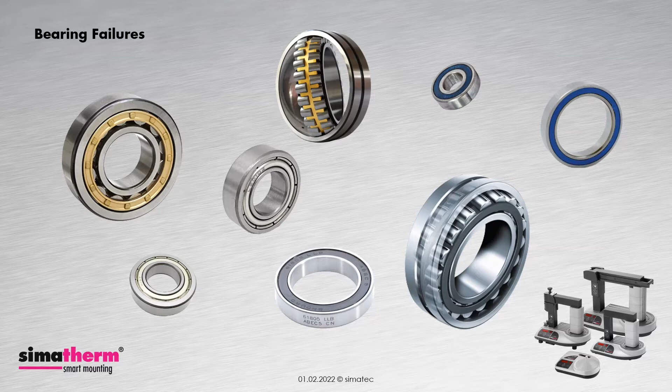Rolling bearings are used billions of times around the world and have become an indispensable part of mechanical engineering. The expectation of the service life of such bearings is correspondingly high. The service life depends on various factors. Of course, the selection of the correct bearing type and the required dimensions play a central role here. However, the correct installation method and the lubrication are often underestimated, forgotten, or even ignored.

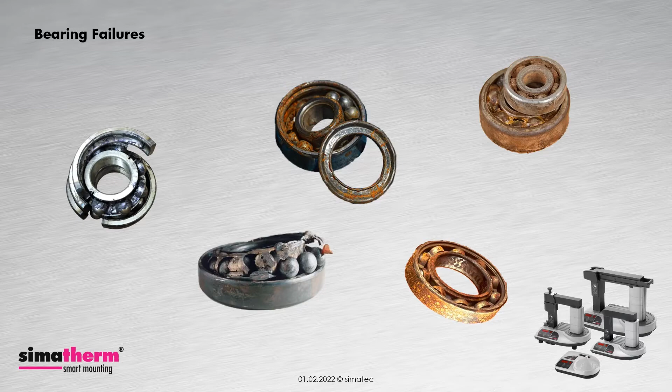In practice, many rolling bearings fail at an early stage of their service life and do not achieve the originally calculated or estimated service life by far. More than 60% of all premature bearing failures could be avoided.

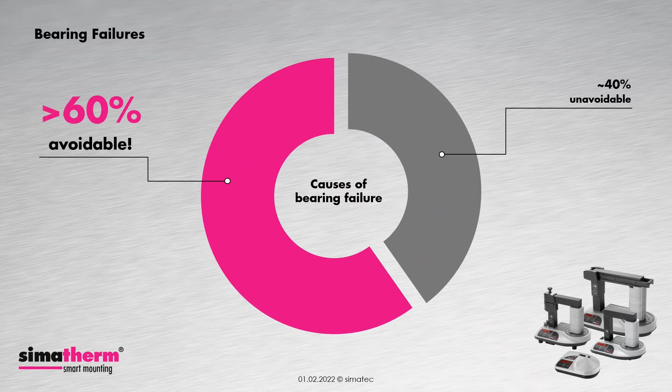Looking at different studies concerning the cause and frequency of bearing failures, they can be divided into the following groups. About 14% of early bearing failures are due to external contamination. Approximately 36% due to insufficient lubrication. Another 34% fall into the material fatigue category. And about 16% of early bearing failures are due to improper assembly.

If suitable mounting tools and the necessary knowledge are lacking when replacing rolling bearings, new bearings are often subjected to high forces during mounting and thus damaged. Early bearing failures are thus pre-programmed. The right method with professional special tools already helps against this during bearing fitting. Only in this way will the new bearings achieve the expected service life.

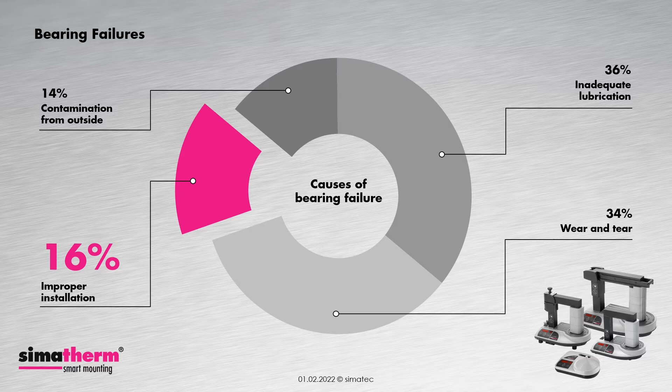Our simatherm heating devices and Simatool quality tools were developed exactly for this purpose. They guarantee a successful experience in all aspects of mounting and dismounting rolling bearings. In this presentation, we will focus on the different simatherm heating devices.

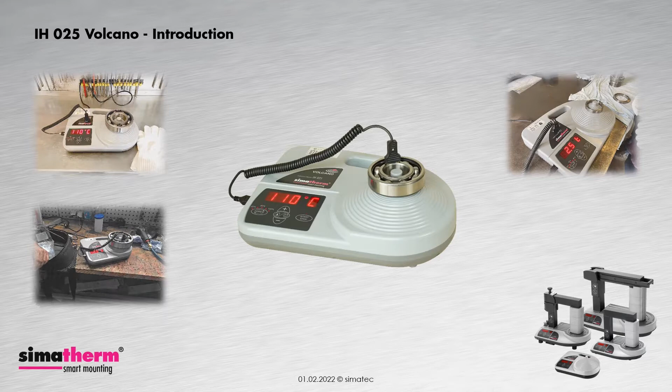Let's take a closer look at simatherm induction heaters. First, our smallest induction heating device, the IH025 Volcano. The IH025 Volcano is suitable for heating rolling bearings or other ring-shaped workpieces such as bushings, shrink rings, pulleys, rings, or similar. It is portable and intended mainly for repair work and rolling bearing replacement in the field by service and maintenance staff.

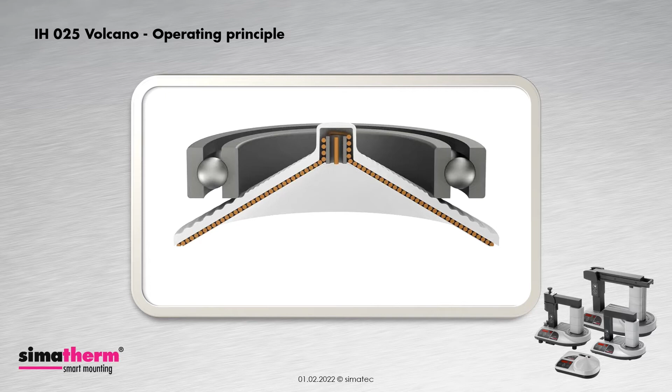But how does it work? The IH025 Volcano generates a magnetic field in the medium frequency range, similar to an inductive hot plate. This magnetic field induces an electrical voltage specifically in the inner ring of the workpiece. The generated eddy currents efficiently heat the component. The heat is generated within the workpiece by the current flow, leaving all other parts of the heating device cold. Since the heating principle is based on the eddy current principle, the parts to be heated must be made of ferritic, that means magnetic, metals. Whether the part to be heated is magnetic can be easily checked using the magnet of the temperature probe. This heating method, patented by Simatec, enables components to be heated quickly, easily, and energy efficiently.

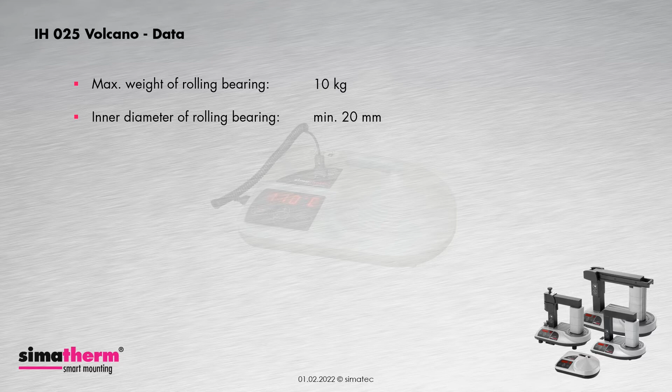Let's briefly look at the most important technical data of the IH025 Volcano. The IH025 Volcano can be used for workpieces with a maximum weight of 10 kilograms. The inner diameter of the workpiece must be at least 20 millimeters, and the outer diameter must not exceed 160 millimeters. The heating temperature can be set in the range from 20 to 180 degrees Celsius, degree by degree.

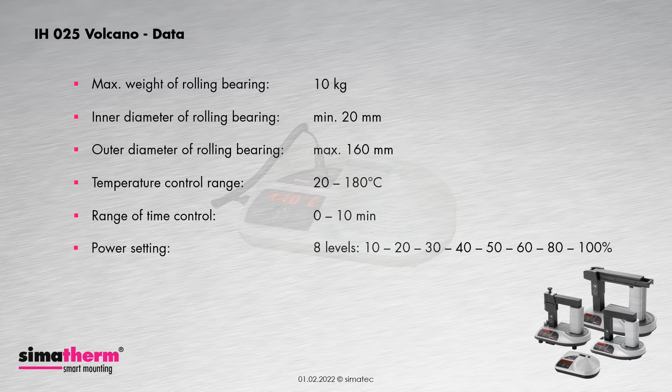If the workpiece is heated by using the automatic timer, the heating time can be set in the range from 0 to a maximum of 10 minutes. In addition, the power of the unit can be adjusted as required. There are 8 power levels available for the user. The device is available in 3 different versions for different voltages: 100 volt, 110 to 120 volt, and 220 to 240 volt. This must be kept in mind when ordering. Which version is the right one depends on the existing voltage at the place of use.

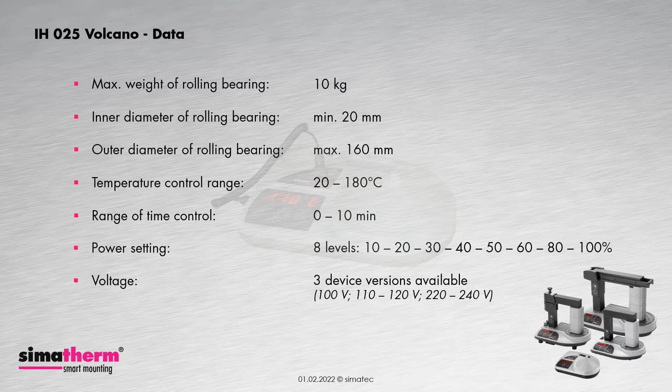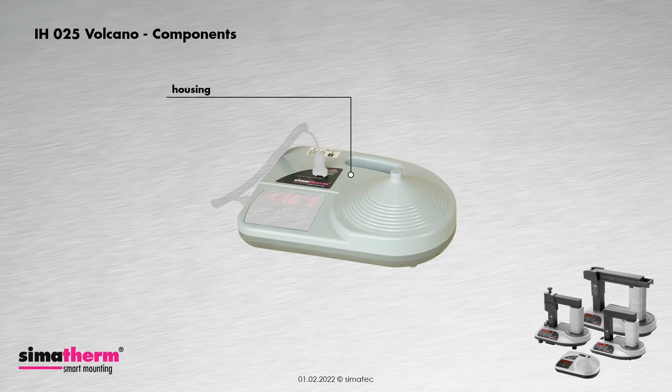Let's talk about the main components of the IH025 Volcano. First of all, we have the plastic casing. On the control panel, the desired temperature or heating time and the power level are set, and the heating cycle is started. The workpiece to be heated is placed on the step-shaped support cone. The temperature probe is required when the workpiece is heated in temperature mode and is used to monitor the workpiece temperature.

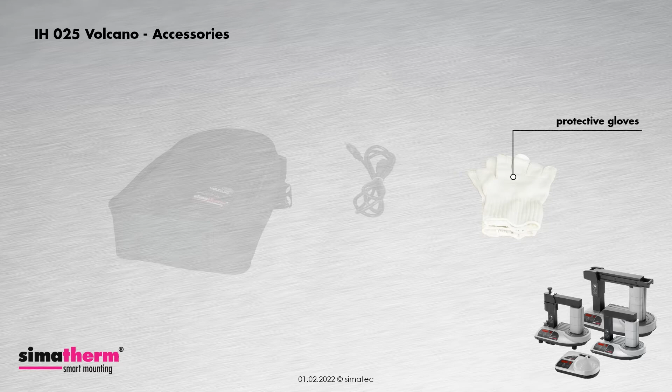Here again the components in the overview. The IH025 Volcano comes with the following standard accessories. First of all, we have the practical carrying bag with a strap. Each device is supplied with a country-specific power cable. To remove the hot components from the unit and to prevent hands from being burned, protective gloves are also included as standard. And last but not least, the already mentioned temperature probe.

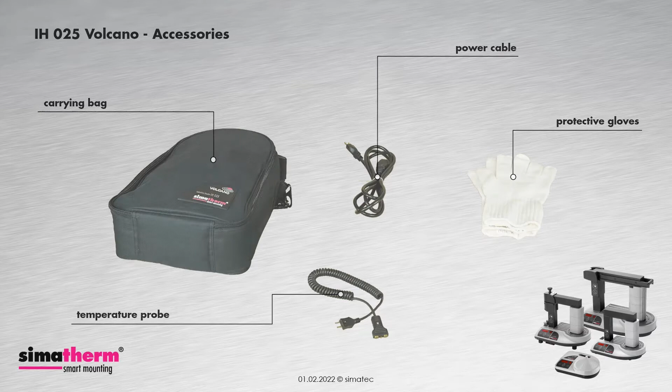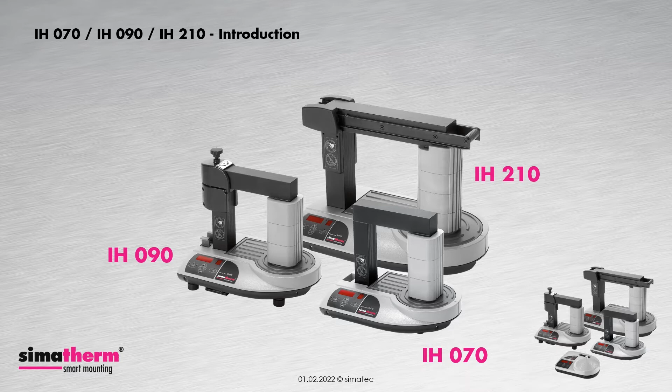In addition to the IH025 Volcano, we also offer other induction heaters: the IH070, the IH090 and the IH210. These are intended for heating rolling bearings; however, other ring-shaped components made of metal can also be heated, for example liners, shrink rings, pulleys or gears. These units can be used to heat components that fit over the induction coil and between the 2 vertical yoke supports when the yoke is closed. Furthermore, smaller bearings or workpieces can also be heated by placing them on one of the standard yokes.

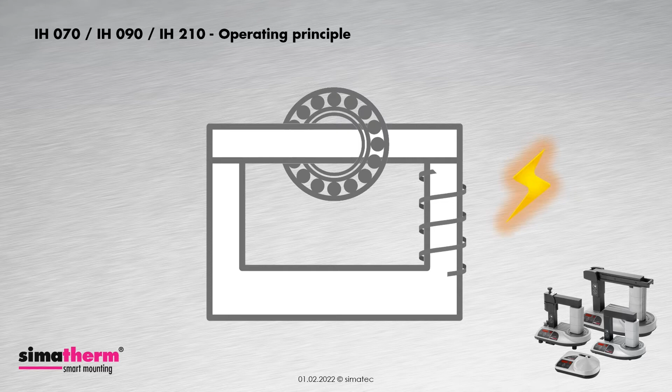The mode of operation is comparable to an electric transformer. By using an induction coil, a very high current with low voltage is induced into the ring-shaped workpiece. This heats the workpiece evenly within minutes.

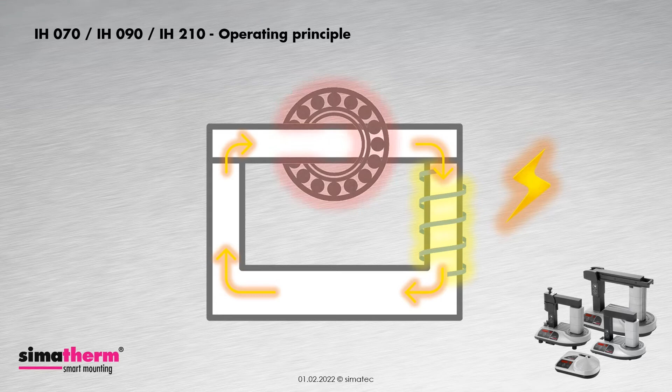Only the workpiece becomes hot. The device remains cold and can be touched at any time without danger. Induction heating is very efficient because the workpiece is heated directly by the induction current.

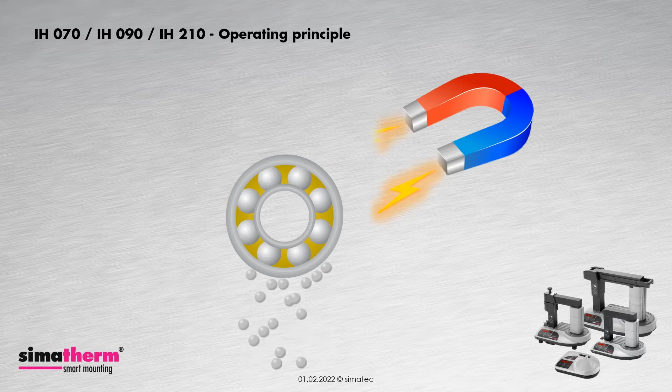Since inductively heated bearings become magnetic, there is a risk that the bearings will attract metallic contaminants that can damage the bearing in the long term. To prevent this, our simatherm heaters are equipped with an automatic demagnetizing electronic as standard. This means that as soon as the heating cycle is stopped, the bearings are automatically demagnetized.

When using the simatherm heaters IH070, IH090 and IH210, make sure to select the correct support yoke.

Workpieces are heated most efficiently when they can be placed around the vertical coil. In this case, always use the largest support yoke to close the circuit.

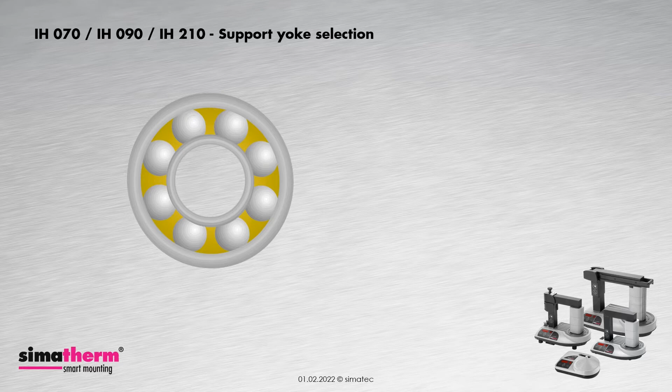In order to be able to use the devices optimally, there are support yokes with different cross sections. To achieve the optimum efficiency of the heating devices, the largest possible yoke must always be used. If a too small yoke is used, the heating process takes longer and the energy consumption also increases. The unit therefore no longer works efficiently. In extreme cases, the unit can overheat.

The workpiece does not have to touch the support yoke or the coil in order to be heated. It is therefore possible to heat large workpieces that rest on the support rack but do not touch the yoke.

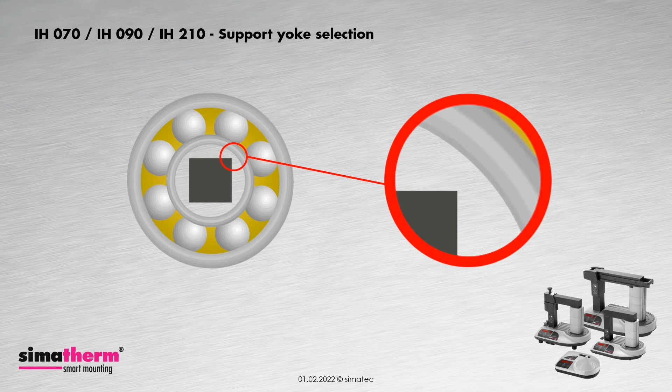In some cases, it is necessary to optimize the cycle time or the heating time. For example, in serial assembly, in which the individual assembly steps must be completed in a specified cycle time. By adapting the yokes, the cross-section can be enlarged and the heating time reduced. Such special yokes are manufactured according to customer-specific requirements and are only available on request.

Next, we will take a closer look at the three devices. We will start with the IH 070.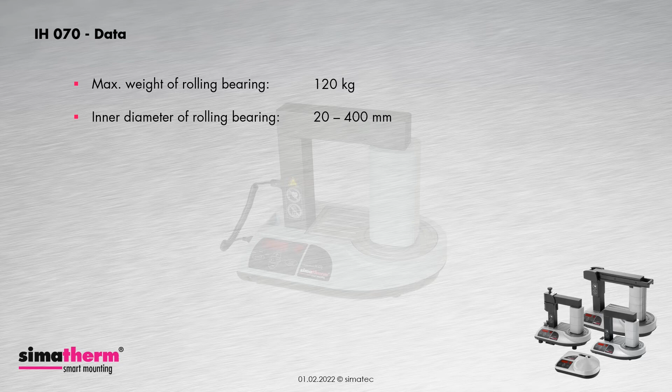The maximum workpiece weight that can be heated with the IH070 is 120 kilograms. The workpiece inner diameter must be between 20 and 400 millimeters. The heating temperature can be set in the range from 20 to 250 degrees Celsius, degree by degree. The heating time for the automatic timer can be set from 0 to a maximum of 60 minutes. The unit is equipped with 5 power levels that allow the user to easily and quickly adjust the power.

The IH070 uses so-called support yokes. Like the IH025 Volcano, the IH070 is available for 100 volt, 110 to 120 volt and 220 to 240 volt.

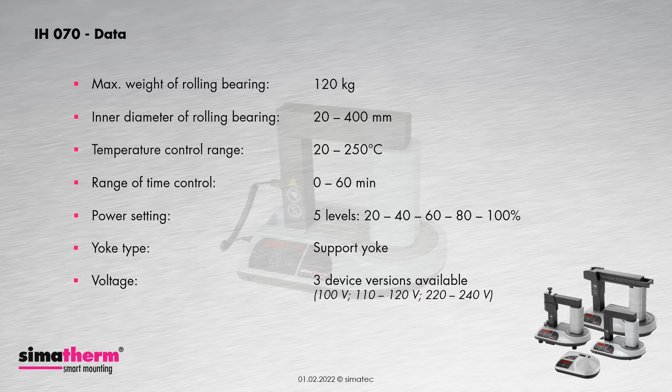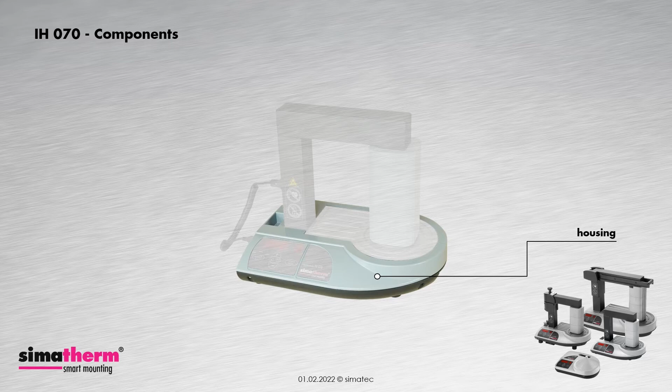One of the most important components is the housing, which is made of cast aluminium. The desired settings such as temperature, heating time, power level and so on can be easily and conveniently set on the clearly arranged control panel.

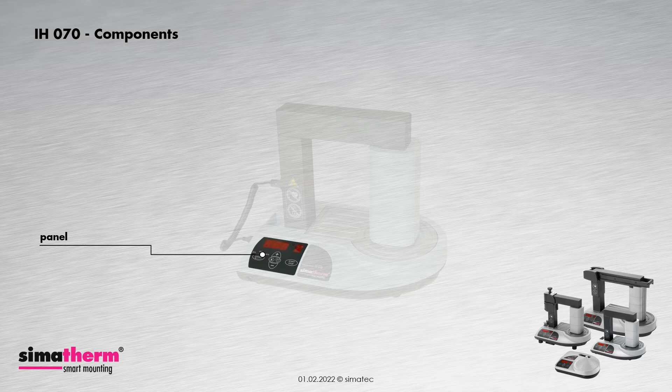On top of the housing is the so-called rack. The U-core is one of the central components. It is screwed to the base of the housing. The lower brace of the U-core is hidden by the housing and the rack, so only the two vertical arms can be seen.

The yoke, which has already been mentioned several times, is placed on the U-core to close the circuit. Another key component of this type of device is the coil, which is mounted over the right vertical arm of the U-core.

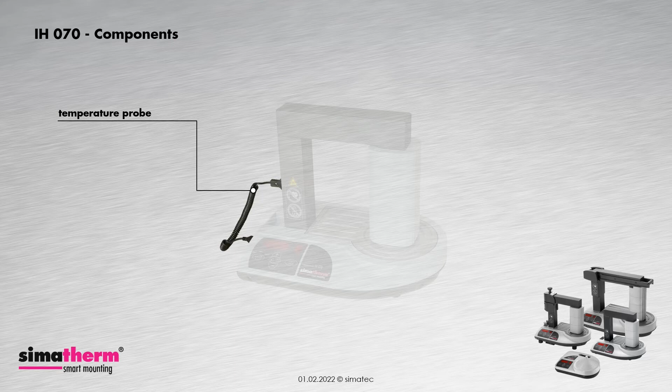And last but not least, we also have the temperature probe. This probe measures the temperature of the workpiece during the heating process when temperature mode is used. As soon as the target temperature is reached, the heating process is stopped. In this way, unintentional overheating of the workpiece can be avoided. Here is an overview of all the important components.

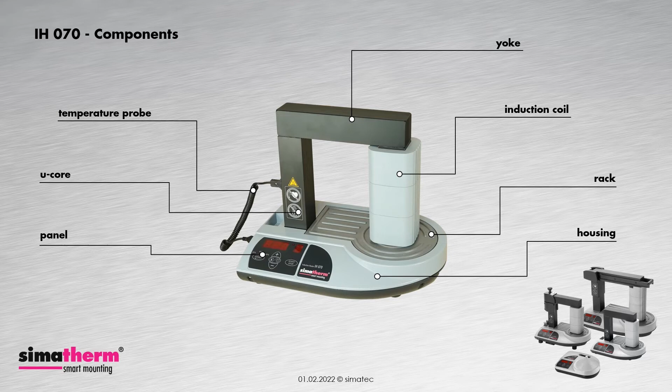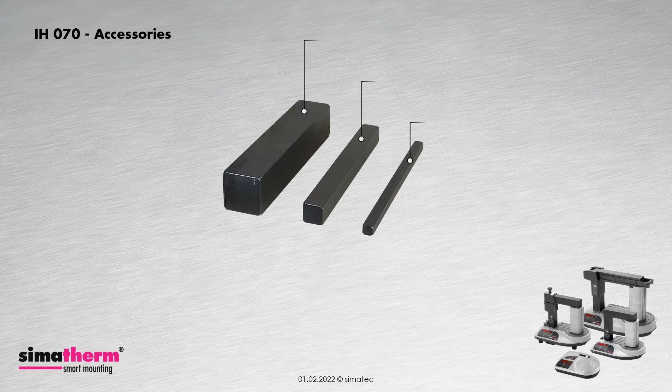Next, let's take a quick look at the IH070's standard accessories. As already mentioned, the appropriate yoke must be selected for efficient heating of the workpieces. The IH070 is supplied as standard with 3 yokes. These have a square cross-section of 55, 28 and 14 mm.

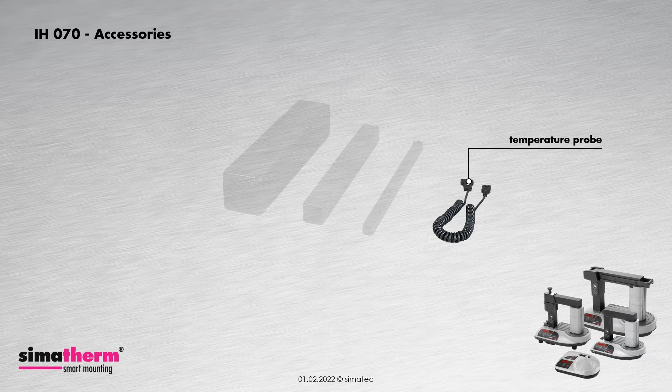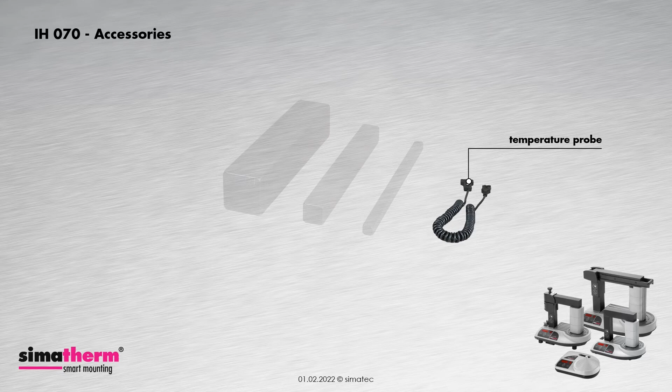Of course, the temperature probe is also included in the scope of delivery. By the way, the same temperature probe is used for all simatherm induction heaters. So, if you have an IH025 Volcano and an IH070, for example, you can interchange the temperature probes of the devices. And of course, the protective gloves must not be missing here.

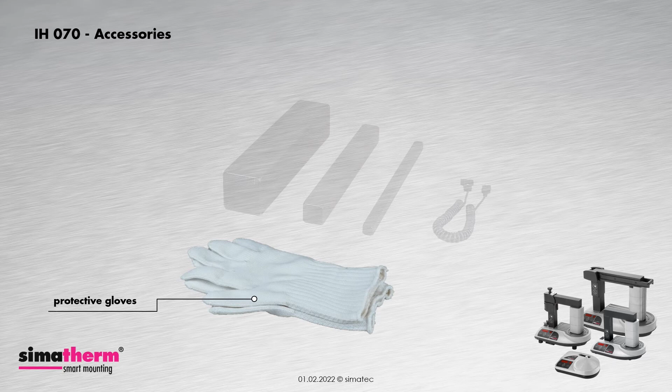Here again, the standard accessories of the IH070 at a glance.

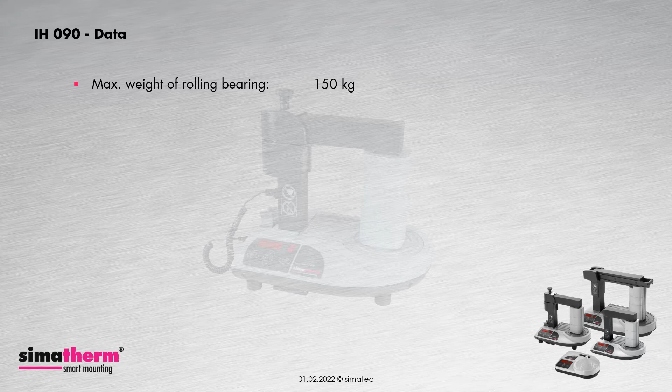Next we will take a look at the IH090. The maximum workpiece weight that can be heated with the IH090 is 150 kilograms. The workpiece inner diameter must be between 20 and 400 mm as with the IH070. Also, the setting range from 20 to 250 degrees Celsius for the heating temperature and the setting range of 0 to 60 minutes for the automatic timer are identical to the IH070.

The IH090 also has 5 different power levels, but is equipped with a fan for continuous operation as standard. In addition, the so-called swivel arm for the yokes is also fitted as standard on the IH090.

But the biggest difference to the IH070 is the voltage. The IH090 is available for voltages of 200 to 230 volt, 400 to 480 volt, and for 500 to 575 volt. As with all devices, this depends on the voltage available at the place of use.

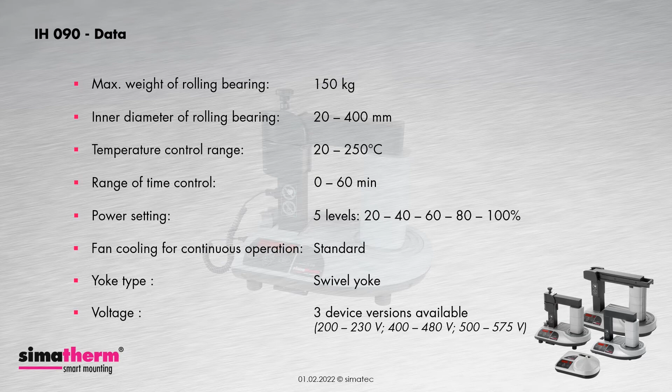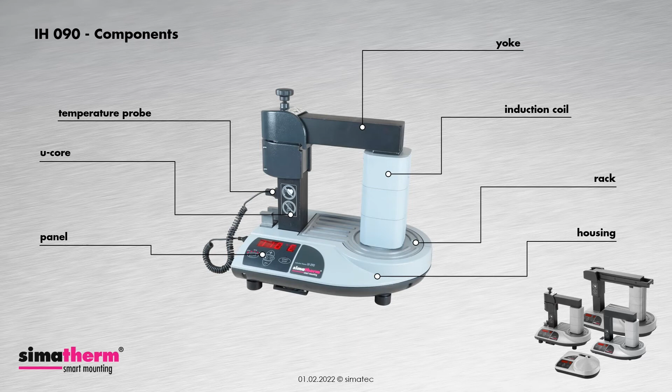As the sizes of the IH070 and IH090 are identical, most of the components are used for both devices. The swivel arm is attached to the IH090 as standard. With this swivel arm, the yoke can be easily swiveled forward to place the component to be heated around the coil or on the yoke.

The fan is mounted on the bottom of the housing. This ensures that the device does not overheat, even when heating many workpieces in a short period of time. The higher feet are needed to keep the device stable with the fan attached. Finally, once again an overview of the components.

Of course, there are also parallels to the IH070 in regard to its accessories. The 3 yokes, the temperature probe, and of course the protective gloves are all included in the scope of delivery. By the way, the 3 yokes are identical to the yokes of the IH070.

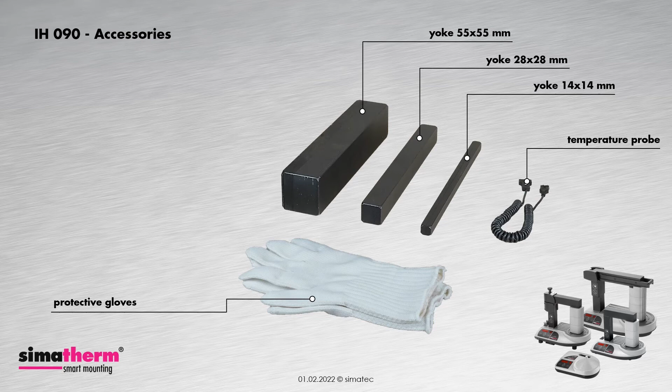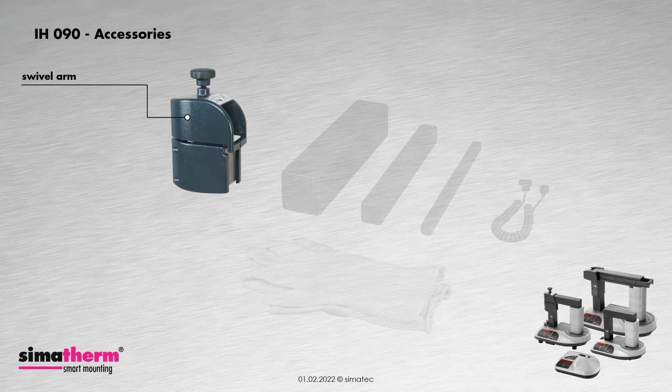As already mentioned, the IH090 is equipped with the swivel arm as standard. In order to be able to use the two smaller yokes with the swivel arm, the yoke adapter is required. This is also included as a standard with the IH090. And here again, the overview of the standard accessories.

Now let's move on to the IH210. As you can easily see, the IH210 corresponds to the IH070 and IH090 not only in functionality but also in design. So there are again some parallels to the two smaller devices. First, let's take a look at the device's data as well.

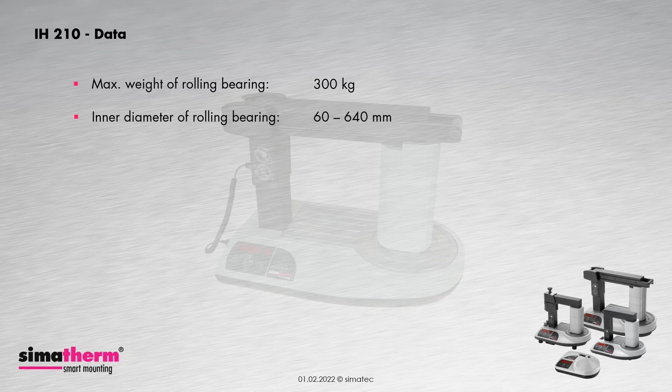Since the IH210 is larger than the other two units, not only heavier, but also larger workpieces can be heated. This allows workpieces with a maximum weight of 300 kilograms and an inner diameter of 60 to a maximum of 640 millimeters to be heated. As with the IH070 and IH090, the heating temperature can be adjusted by degrees in the range from 20 to 250 degrees Celsius.

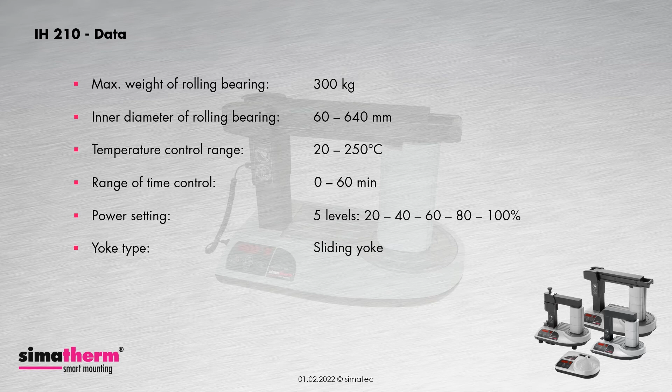There are also no differences in the setting of the heating time and the number of power stages. The heating time can also be set to a maximum of 60 minutes, and there are also 5 power levels. The standard yoke of the IH210 is considerably larger and heavier than the large yoke of the IH090 and is therefore built as a sliding yoke.

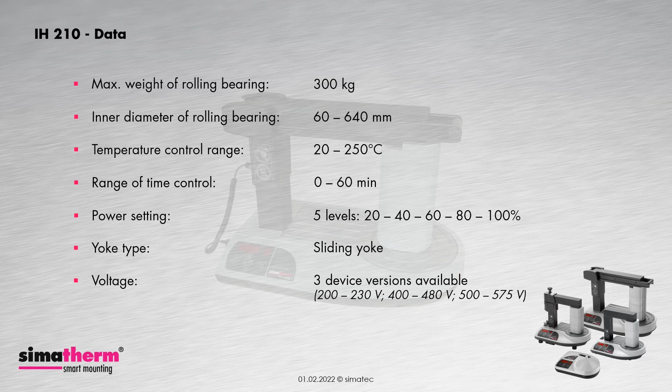Regarding voltages, the device again corresponds to the IH090. The IH210 is also available for voltages of 200 to 230 volt, 400 to 480 volt and 500 to 575 volt. Let's move on to the components of the IH210. Here again the already known components.

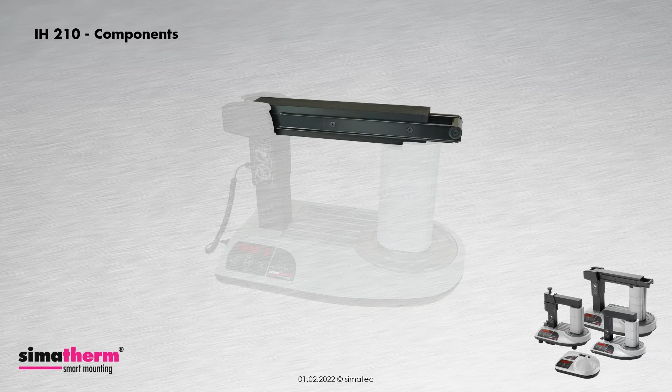The standard yoke of the IH210 has a square cross-section of 70 mm and is pushed to the left to open. Due to its weight, it cannot be used as a swing yoke, as otherwise the unit would tilt forward when opening the yoke. The roller support is used as a guide and as a stopper for the sliding yoke. And here again a small overview of the most important components.

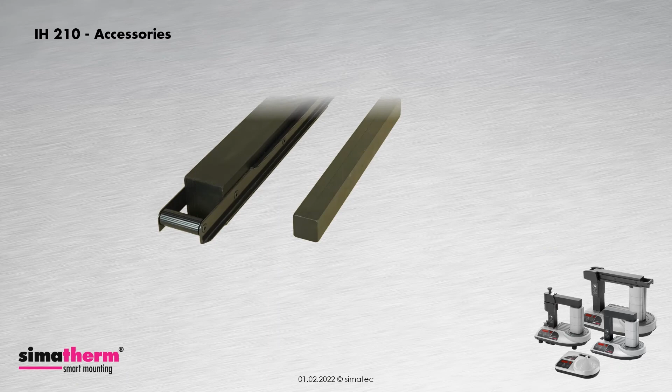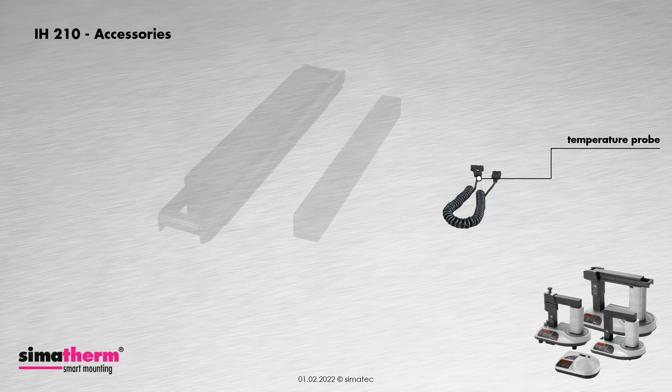Included with the IH210 is the sliding yoke with a square cross-section of 70 mm and a support yoke with a square cross-section of 40 mm for smaller workpieces. Of course, the temperature probe must not be missing here either. And as with all simatec heaters, the IH210 comes with a pair of protective gloves.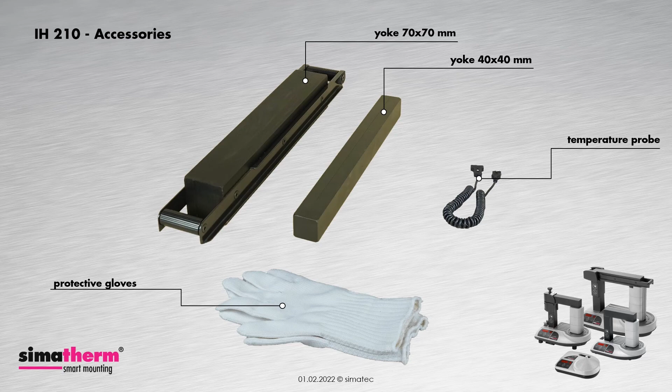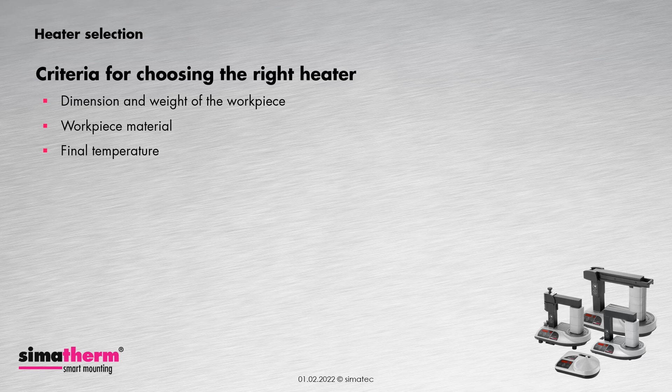Now that we have learned about all simatherm induction heaters, the question is, which device is the right one for my application? The choice of the right device depends on the following criteria: dimension and weight of the workpiece, material of the workpiece, final temperature to which the workpiece must be heated, the heating time, that means how long the heating may take at most, and whether the unit is to be used for single parts or in serial operation.

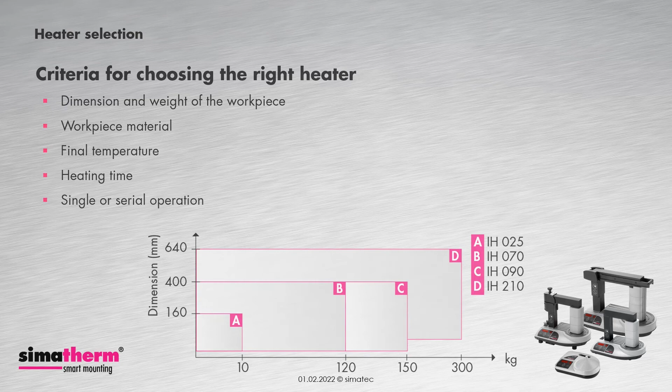In addition to our simatherm induction heaters, we also offer two hot plates, the HPS and the HPL. HP means hot plate, the S stands for small, and the L stands for large. Both hot plates are controlled by a temperature controller and are especially suitable for small bearings and machine parts.

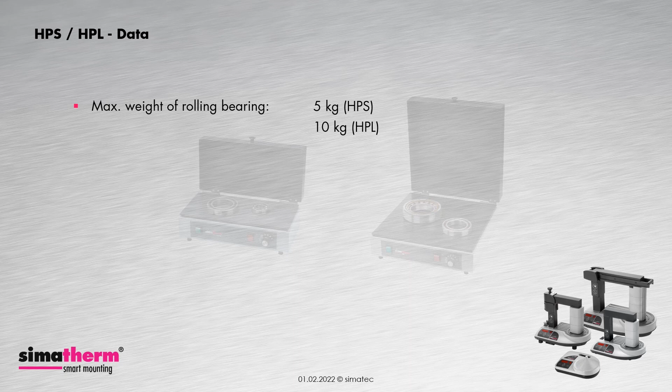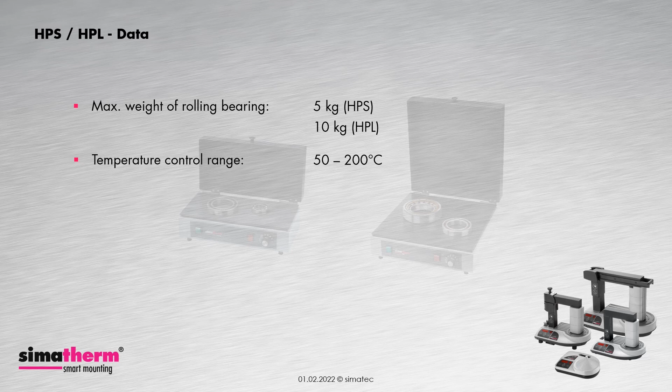The HPS can be used to heat workpieces with a total weight of maximum 5 kg and the HPL of maximum 10 kg. The temperature can be set in the range of 50 to 200 degrees Celsius using the knob. In contrast to the induction heaters, not the desired target temperature of the workpiece to be heated is set at the hot plate, but the temperature of the heating plate itself. In addition, the hot plates are not able to monitor the workpiece temperature.